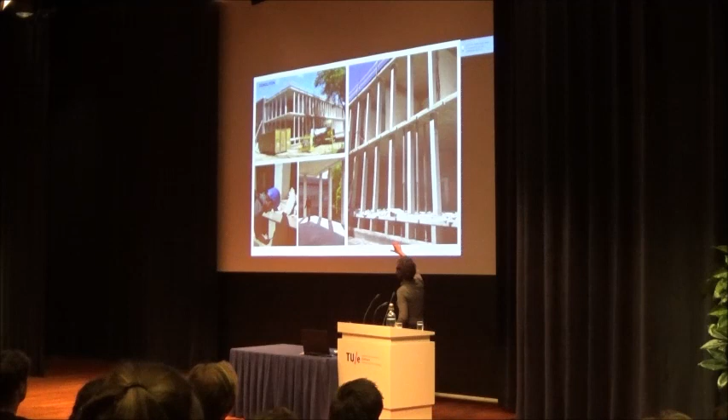Here we see the demolition. Of course it was full of asbestos, and they had to take all the asbestos out. We also see the really defined structure, so every 80 centimeters there is a column. And at the left back you see the brick structure. During this demolition, which was totally helpful for us, they took all the stuff out of the building and dumped it against the brick wall.

During the competition we were told we had to recycle the brick wall because it was in good condition and more durable, etc. But then the builders trashed all the building rubble against the brick wall, and the wall cracked. So then we could also design a new facade for this brick wall. Sometimes it's turning your way.

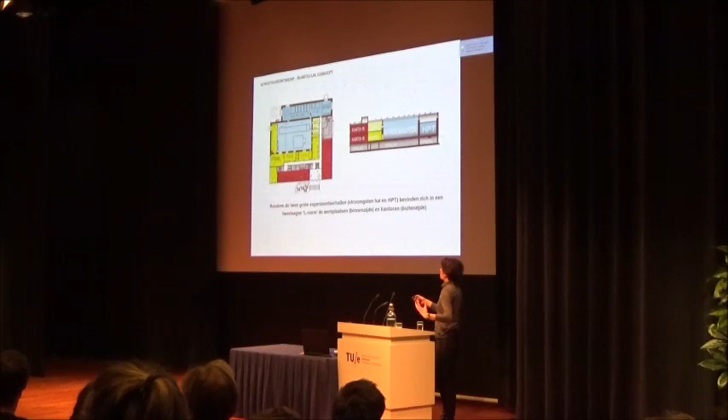They have five different groups spread over the whole University of Utrecht, each with a lot of space to do what they want. Now they have to collect themselves in this building. They were never together before. Somehow they see the benefit, because of course you get cross-pollination between the different disciplines, but on the other hand they now have so much less space. So it was a big discussion, talking with them about how to fit all these different disciplines into this one building.

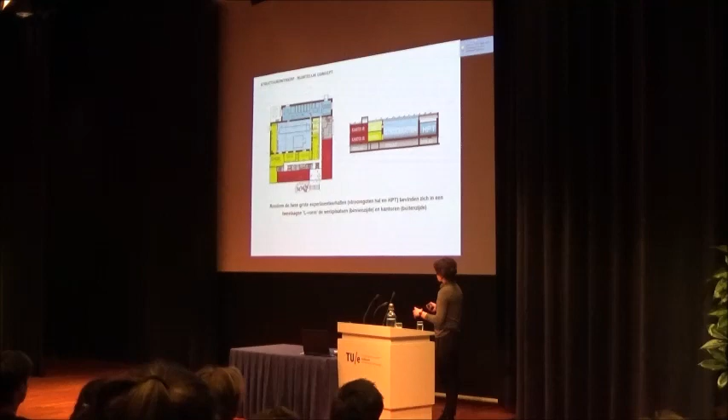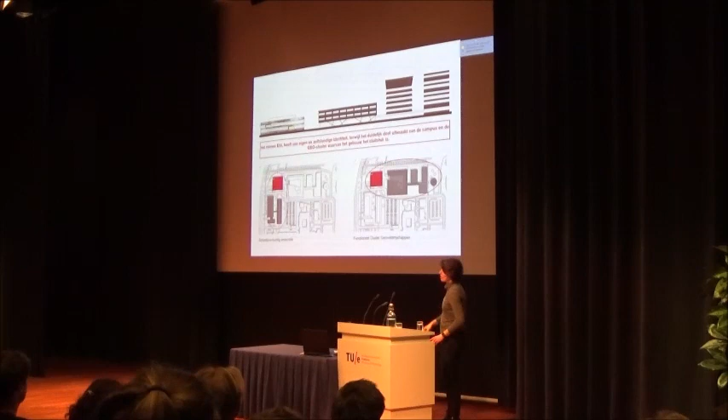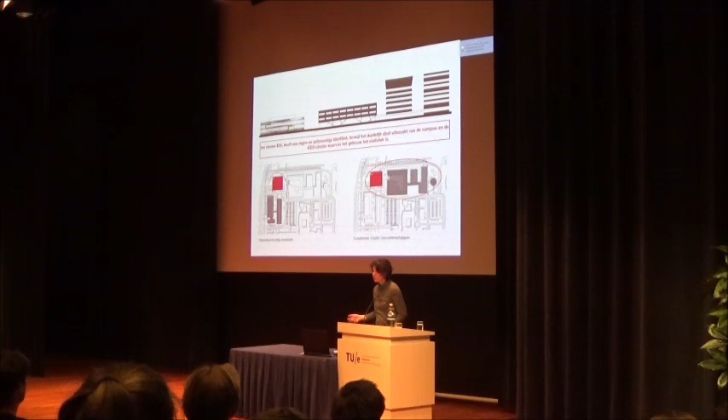Whatever is said, it's also a cluster - a cluster of geoscience. Our building is in the red, and somehow they also feel it a bit as a cluster. You have the cluster of medical science at the University of Utrecht, and then you have this cluster of geoscience. So somewhere there has to be something like, I'm part of this, and I look a bit like the neighbor, but I'm just a bit different. That's also what we picked up in this design, so you see these strong horizontal bands.

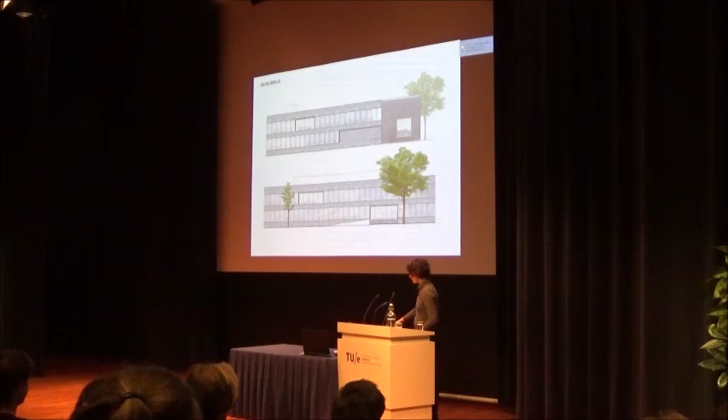That's something we said we should pick up in order to be part of this geocluster. And this was the facade expression as we presented it for our competition design. So with the old brick facade and the strong horizontal bands, we took away the upstand, so you had full glass from floor to ceiling for the offices and laboratories.

That's also a bit like referring to our background. My partner Dirk and myself, we both were at Herzog & de Meuron. Afterwards Dirk went to OMA and myself to Foster. But for us, the reference for having an office, how you work, and the way we want to work is still Herzog & de Meuron simply. And of course they're also famous for the facade, and that's also what still triggers us in our conversations about how we want the building to express itself in its context - in this sense, the University of Utrecht.

It's the Faculty of Geoscience, so at a certain moment we had all these really beautiful pictures on the wall as inspiration about what the Faculty of Geoscience is working with and what it's about. Our idea was to somehow represent this identity of geoscience in the facade. Especially because people from Japan and America, everybody's coming here, and to really express within this huge amount of buildings on such a university area where you as a group of researchers stand for was first important. So we took one of these pictures and did an abstraction on it, and we wanted to show it in the facade.

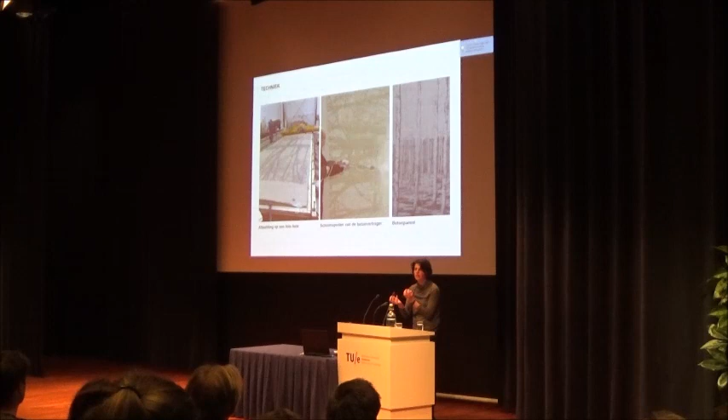On that spot where there was the paste, it eats, let's say, the top surface out of the concrete. So partly your concrete is still the smooth concrete as we know it, and partly the concrete is this kind of 60s concrete where you see the little stones. In that way, you get the difference in expression from the top layer of your concrete, and then you can make images like you see here on the right hand side.

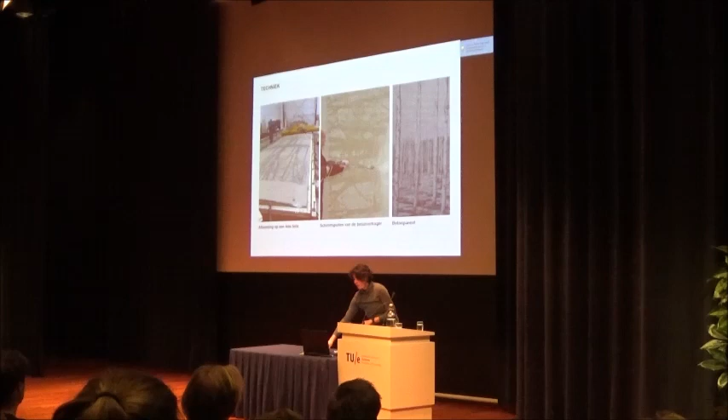I explained this when presenting the competition for the Faculty of Geoscience, especially because it's a procedure which has to do with a natural material like concrete and kind of biting out of the concrete. They immediately had an attachment to it and felt that's a procedure about natural materials - how do you treat natural materials, and what's at the end the outcome of it. They were totally convinced about this concept, and also about expressing where they stand for to the outside. So this was one of the images we had at our competition design.

But then we went into the VO stage, and we came to the conclusion that for every panel - and we have 90 panels on this building - you have to buy a new membrane every time. So we had to buy 90 membranes, and the cost of the membrane was really high. There's no repetition in it, so basically there was no way we could afford it. I mean, it's not a museum or whatsoever, it's a public entity, it's a university. So basically, then our concept was gone.

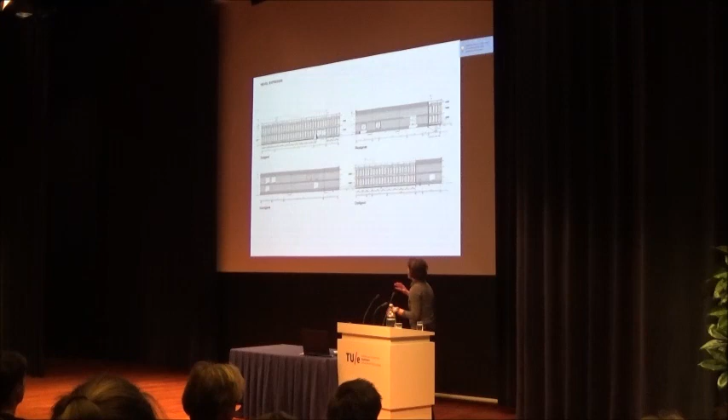What we do in our office, when we have such an idea, we constantly try to switch between making renders, like you see here, and on the other hand also making models.

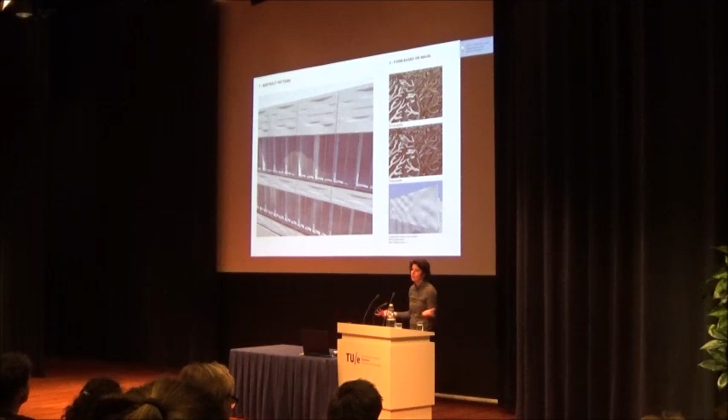Going back to this, what we basically saw here - my meeting is all the time in Utrecht, and I see this building from Wiel Arets, this library, if you all know it. I thought we do the same, only that we make a positive instead of him making a negative, and I was like, no, that's not going to work. Then thinking about universities, since I studied here in Eindhoven, I was like, okay, let's switch to something more modern.

We did different site visits here under the building of Wiel Arets, which we thought first was nice. But the problem with glass is that it's a very vivid material as long as there's light on it. And in the Netherlands, half of the days it's overclouded, and then the glass buildings look dull.

In our case there wouldn't be light from the back because on the opposite it's glass from floor to ceiling, and this imprint glass is basically a black box. So there wouldn't be something sparkling behind. All the time when we tried things with this glass, we found out that it's absolutely a dull material, and also if you render it, nothing is sparkling.

Then we started to think about layering the glass, but the problem is also, for your reference, such a panel is more than 3 meters long and 1 meter high, and the top ones are 2 meter 40 high. So it's 3 meter by 2 meter 40, and we went to these glass factories and they basically said, if you want to do it a bit economically, you have to do panels of 30 by 30.

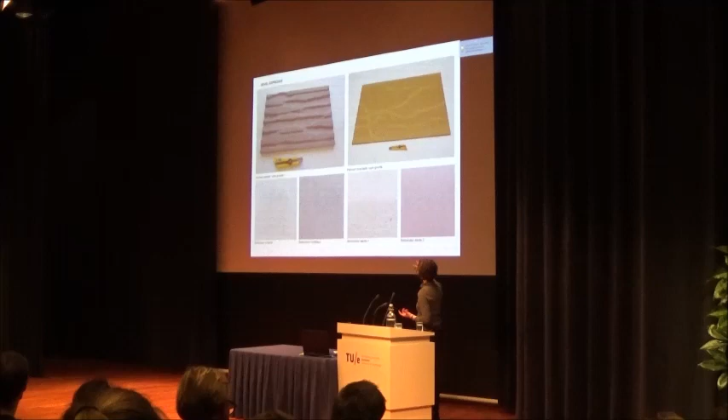From these 1-to-20s we went to 1-to-10, shown in the top right corner, where we tried milling out of an MDF panel. With the top one you see we milled several layers so it really became bumpy, and then we milled with one layer. At the same time we did an extensive research into concrete factories to ask about the different colors of concrete. We wanted to symbolize the color of the earth, so we were looking into these more reddish earth colors.

We also came back to this idea of repetition, but the last thing you want is to simulate a delta and see it's just one panel repeated after another. So we tried to come up with a pattern, a simple trick where you do A, B, C, D, and then these match again. Then you can turn it around so it looks like it's running through, so you do pattern 1, pattern 2, 1, 2, 3, 2, 1, 3, etc. Then it looks like the delta is running through.

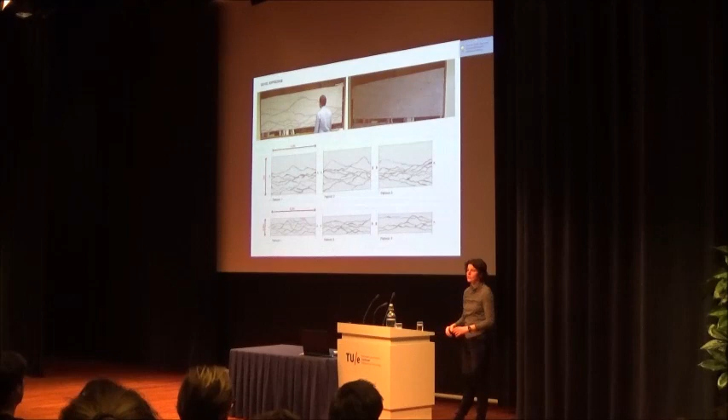So in our office we tried, on a 1-to-1 scale, how such a panel of about 3 meters by 1 meter would look in the two different versions I showed you earlier at 1 to 20 scale.

You should see this a little bit upside down, but then we were thinking, you have this concrete and you start to carve out of it, but that still doesn't really look like a delta, so we had to put something in it to make it look like one.

I had a conversation with an engineer at ABT, explaining that we have this concrete panel but it's a bit dull, and we wanted to pour something into it, maybe glass or resin. I was discussing all kinds of materials.

He came up with the fact that a lot of concrete bridges in the Netherlands these days are reinforced by RVS plates, because there are so many traffic jams on these bridges that they start to bend through.

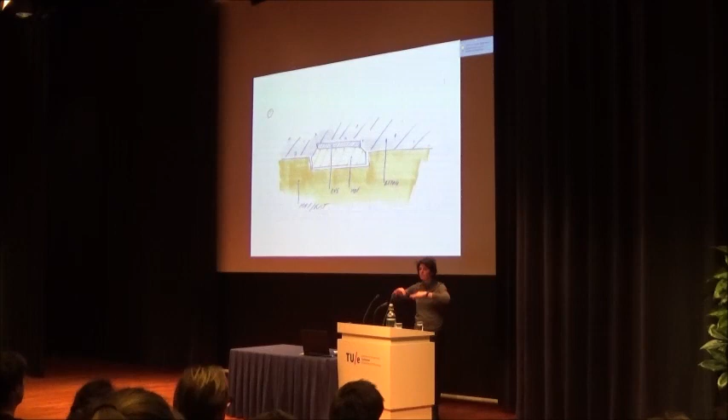Rijkswaterstaat had to come up with an idea to strengthen the bridges, and they do that by putting RVS strips on these concrete bridges. I thought RVS would be beautiful, because it's like a mirror that will shine and symbolize the water.

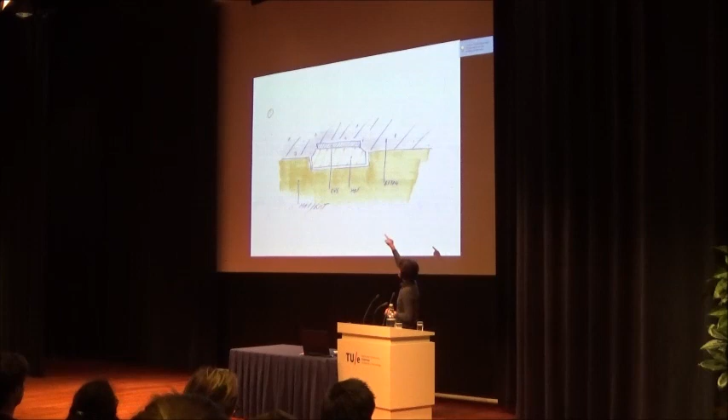So the trick is what you see at the bottom: you have the box where you pour the concrete in, and on that box there's a kind of positive mold. There's a layer of magnet, which is a material that pulls on the RVS effectively, then you put a strip of RVS on it, pour the concrete on, wait, and then lift the panel up. Then you have a panel with concrete with the RVS strip in it, which is this.

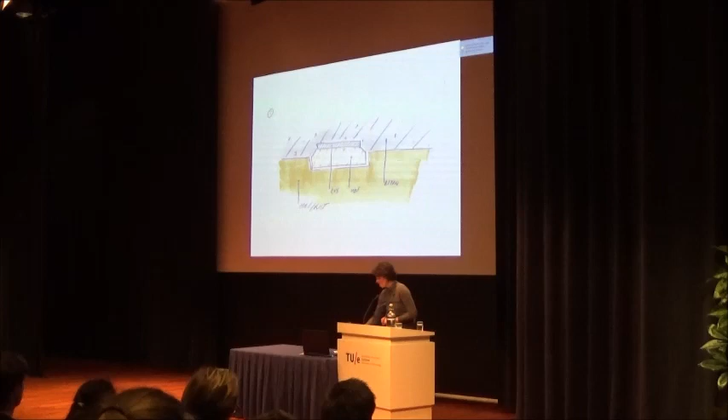So here you see that we tried this process. On the top, I think it's 6 millimeters deepened. On the bottom, the RVS is like 3 millimeters into the concrete panel. And what we also tried, like the first time we did it...

They also didn't instruct us really well, and we didn't give a slight chamfer to the edges, so we couldn't lift the concrete out. This was all trial and error for these concrete factories, since they never did this before - the edge has to chamfer a bit, because you need to pull the concrete off, and you have to make sure the whole thing isn't clamped around the mold, since it shrinks a little as the water goes out.

All of a sudden, after doing all this kind of craftsman's work with the concrete factory, we switch again to making renderings, because that's the only way to get a perception of how it will effectively look on a larger scale of the building. This is a bit of a zoom in, but it shows how the panel presents itself in the whole ensemble.

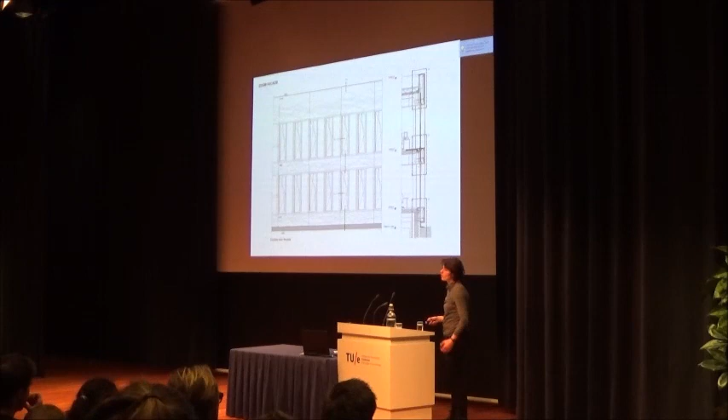As mentioned a couple of times, the glass goes really from floor to ceiling. That was, let's say, a given for us, especially with such a deep building. You want the glass from floor to ceiling to get the light as deep as possible into the building. And we wanted to apply a passive ventilation system, so it's a climate facade, it's a double system.

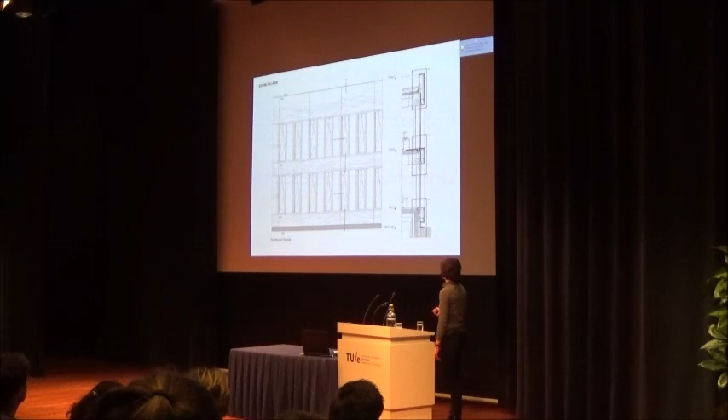Meaning there's a cavity at the bottom, which in summer is open, so the whole thing works as a chimney, and the air is pulled out at the top. Then there is slight overpressure in these rooms on the inside, so the air is pressed out of the facade and ventilated to the top.

And if you desire, you can then open a window there to the climate facade. Also acoustically, because it's close to the highway, it's kind of a durable option in an energetic way - from an acoustic point of view, you would never be able to just open the windows here. So you always had to look at this double system.

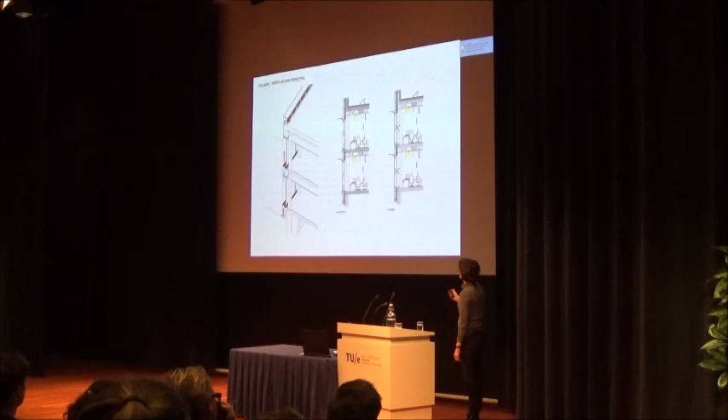Then in a winter situation, you would close it at the bottom. You still have the same principle of the air being pushed through the facade and out to the top. So we had to deal with an existing structure.

These are the columns that you saw. Then to the column there is a steel console attached, which is this orange element. On this orange element, the concrete panels are hanging. The concrete panels are 12 centimeters thick, with the dimensions I expressed earlier.

Then the single glazed element of the climate facade is standing on this concrete panel, and then this double facade of the double glazing element is connected with a bracket to the floor slab.

Then we have sun shading elements in the climate facade, and of course it was our desire to get everything as flush as possible on one line.

Then here you see the box. Here you have a vent, so the air goes through, and then through this box, which is kind of a klepje, pushes the air out into the chimney.

This is then the expression from the inside. Here you see the cables of the sunscreen, and then the double glazed facade with a grid of 80 by 80 centimeters on the inside, and then the single glazed facade with a grid of 1 meter 60 on the outside. This is the vent with a grill, the same grill as applied here, and the electricity etc. which runs through here, which are floor pots.

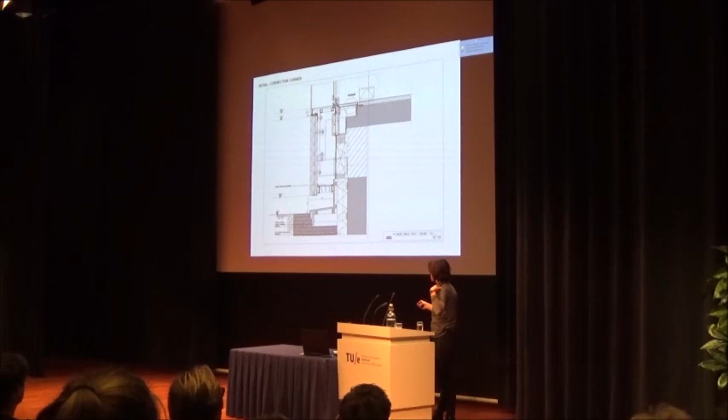And the challenge was also how to design this so that the air indeed has this fluid entry, as you can see.

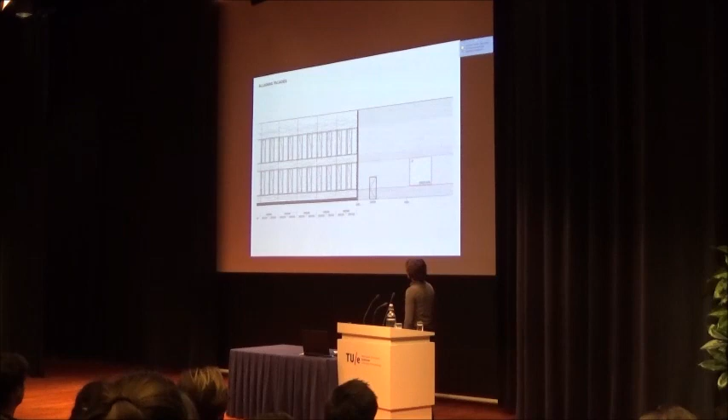The next thing was, due to this building, we also had to really think about the facade expression of this brick facade. The idea was that everything lines through perfectly, and these horizontal bands are also expressed in this brick facade, and the windows, as they are here 3 meters high, are also 3 meters high in this brick facade. And since this has a certain relief, we also wanted to apply a certain relief in this zone.

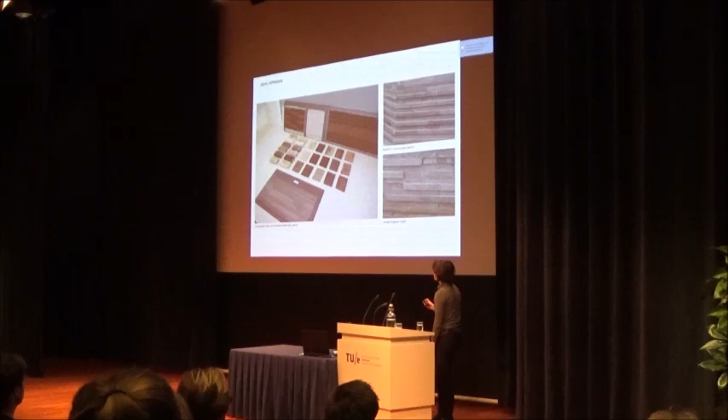Well, here you see the whole test of what kind of colors we wanted to go with, and at the end a test piece about the relief, whether you want to use a continuing relief or more jumping types.

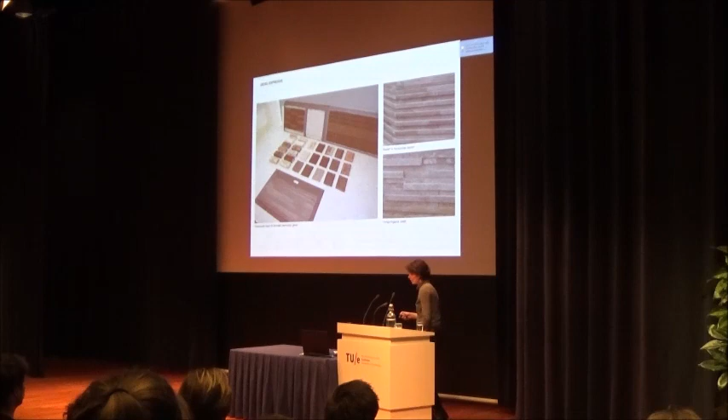And again, you see here the swap as we try to apply it, that we go from looking at real materials, real colors, talking with these builder guys, to then try to render it in our office in detail, how we want the junction, and also how we want the climate facade to be totally flush. Also here have the glass totally flush without any framing, joining with this brick facade.

And this is kind of the last studies that you also see, building further on this mock-up that we also had. It's like, what is then the junction and the jump between the climate facade and the brick facade? And is it a U-channel which runs all the way to the bottom, or is it a U-channel which basically folds itself under this climate facade?

And also definitely with the experience that we have as architects, I mean, you can't refer to like, yeah, we did it there 10 times and it worked out. So for us it's really like, okay, we have to test and test again and judge, and also look at different situations in order to be convinced about what we put on paper at the end.

Yeah, so here you see the choice at the end, the U-channel in between. This is then a brick facade. Well, this is the concrete wall, and actually this is an insulation panel, and this brick facade, they are just concrete strips in the shape of bricks, which then are directly glued to this stiff insulation panel.

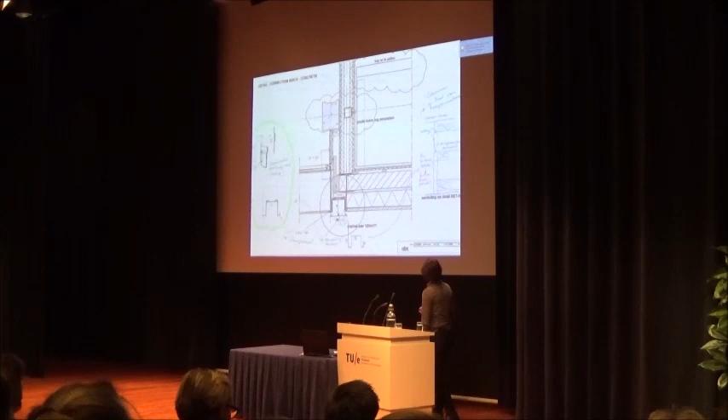But yeah, these are kind of then the sketches that go in the evening to the engineers to ask a bit what is possible.

That project, I spent the whole weekend reading the spec, or in English the specifications. There was a first tender for a builder. At the end there was only one builder which made, let's say, a subscription, so they put it again in the market. The guess is that in April they will choose a builder, and then after the summer break they will start constructing it.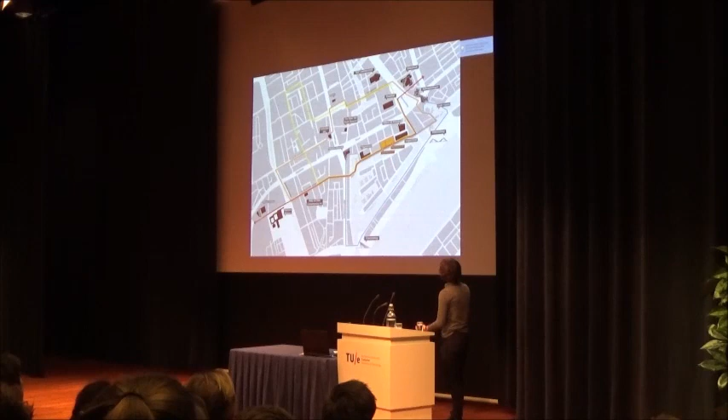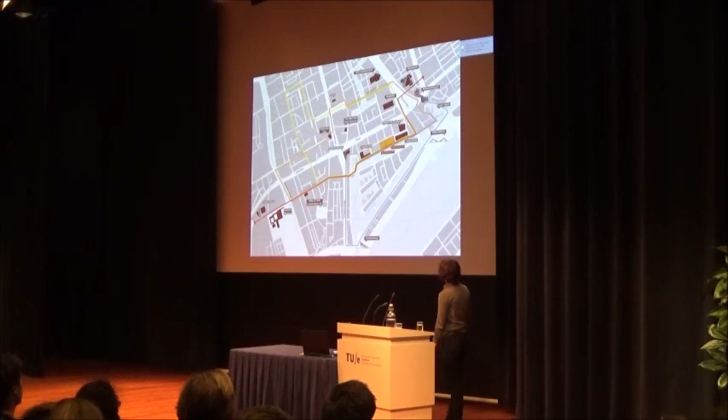And this was also one of the images that we presented to the city, where we said we have actually quite a critical puzzle piece in between the development of the market hall and the Oude Haven, and this is the museum quarter. Rotterdam is investing a lot of money at the moment to make it a more pedestrian city, and in order to connect this with that, it's very important what all happens along this strip, and of course in particular what we're going to do with the architectural expression of such a building.

And especially because we have the ability to create this ensemble with these two towers. Quite in the beginning we had all kinds of different volume studies, and what we basically said is rather than making the plinth, which as I said a couple of times is very important in this development, but rather than making a plinth and a tower on top, we wanted to make one sculptural gesture.

And this is the sculptural gesture which we created, and I'm going to explain a bit more in depth about it. Basically, there's a building regulation which says you have to set the towers 10 meters back from the rooilijn, the edge of your building plot, from the point of 25 meters high. So the tower folds gradually from this 10-meter stepping-back point down to zero, and then to the plane below.

And of course we were already hoping in the beginning of the design stage that our investor would also invest in the neighboring building, and at a certain moment we knew he would. So we took this as a chance to have some fun and bend it slightly away from the neighbor, in order to create the desired privacy for luxurious living in the center of Rotterdam.

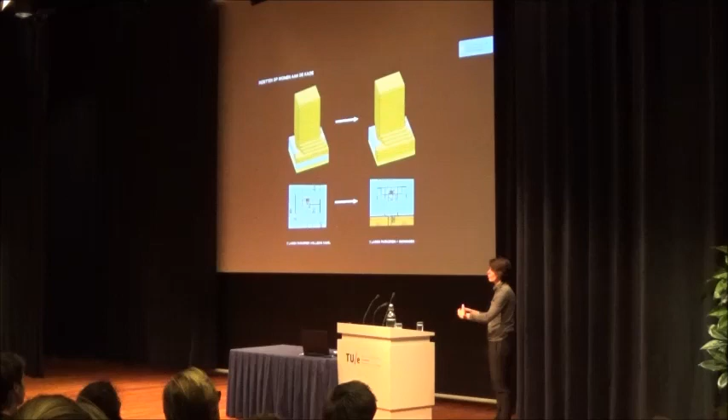The first trigger was that the plinth would be commercial, everybody agreed on that. But in the neighboring building, which we'll see later in a picture, they made two levels of parking above this commercial space, and to me it's so irritating. Every time I bike home I look into this parking garage and see these long TL lights and this anonymousness above the commercial plinth, on what's actually a south-facing facade on the water. So the first thing we said was: that's not what we're going to do.

We're going to make it all waterfront housing instead. We pushed the parking to the back, and as a result we had to do it over three levels, which is of course more costly. But in the end it pays itself back, because this housing becomes so much more valuable, and as a project it has much more generosity and status on the water.

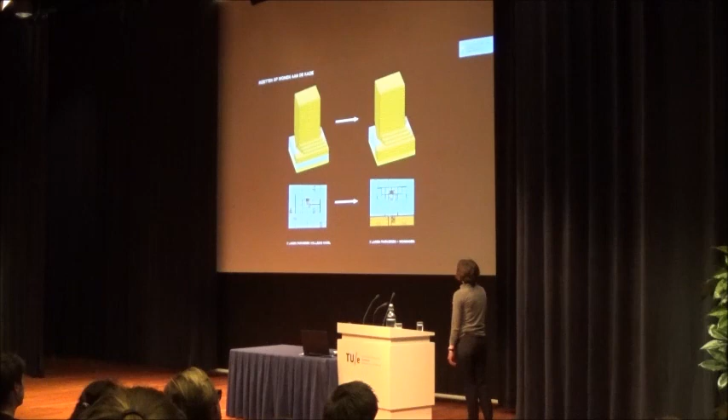The grey areas are the storage boxes. So here you see it's commercial all the way through, then three levels of parking, and a level of storage boxes behind the dwellings in the front.

This is the neighboring building with the parking I was talking about. Here you see our commercial level, then a level of studios which don't need outdoor space. So we couldn't have balconies here, and we optically stretched this plinth a bit higher up to give it the status you'd expect from a project like this. From then on, the dwellings go up until the 23rd floor.

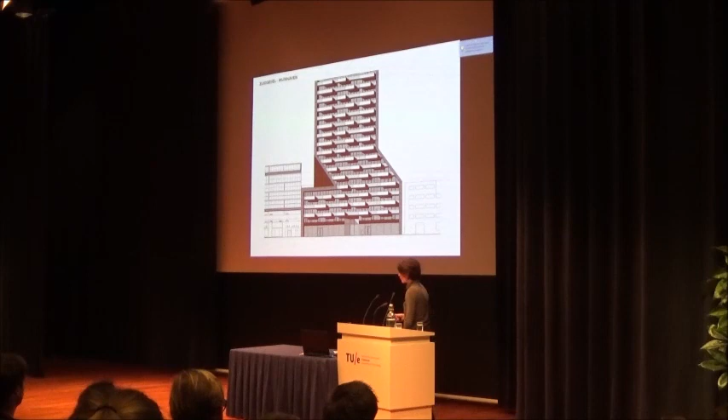It's an impression of this plinth, the black zone is for signage, with the studios here, which I think is a huge improvement over the open cavities that were once approved by Welstand and the neighbors.

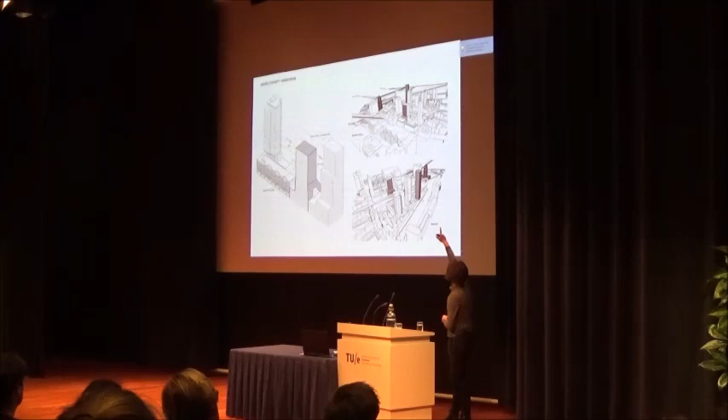The other thing was, besides bending away from the neighbor, we also said in our facade expression we should seek a certain amount of privacy. So the facades on the east and west sides are more closed, while the facades to the north and south, facing the Maas and facing the city, are more open and transparent.

This is also kind of inherent to the building system, because in the end it's what we call in the Netherlands a tunnel system, so effectively there are four tunnels placed next to each other. What's shown in grey here are the load-bearing walls in the project.

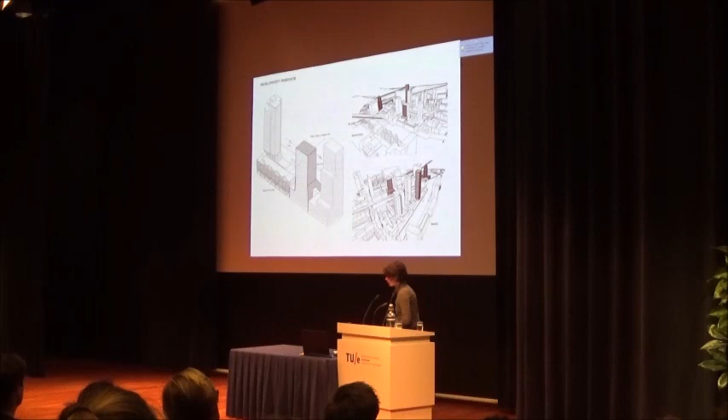We looked at a couple of references for these more enclosed facades, because since it's load-bearing walls, there's of course a limited amount of perforations you can do before the whole thing collapses.

This is the grid system we ended up designing, with two big open windows at the sides and smaller windows in the center, presented as a kind of stacking system on top of each other. These details are very critical, like how much meat you have in the diagonal between this window and that window for the force to go down and carry all the way to the bottom.

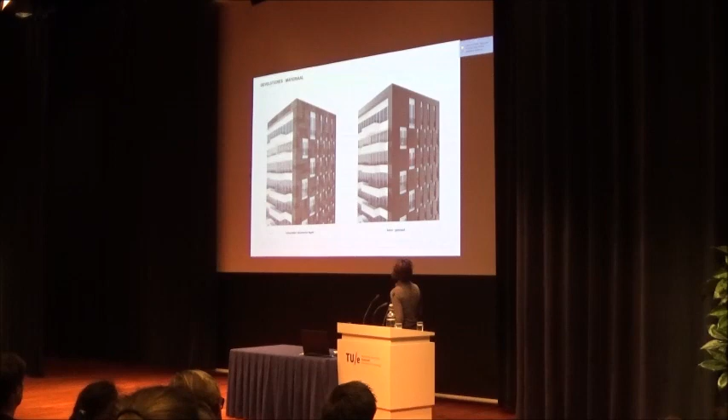Then there comes, of course, this process again about what is the reference, what kind of material is it? So we were looking at ceramic, at concrete, at Eternit, at stone, and that comes into the process when you're rendering and thinking about how it will look. On the left corner, you see if you start to use natural stone, you have to start panelizing it. Or if you want more like concrete, then it can again be one panel with patterns on it or without.

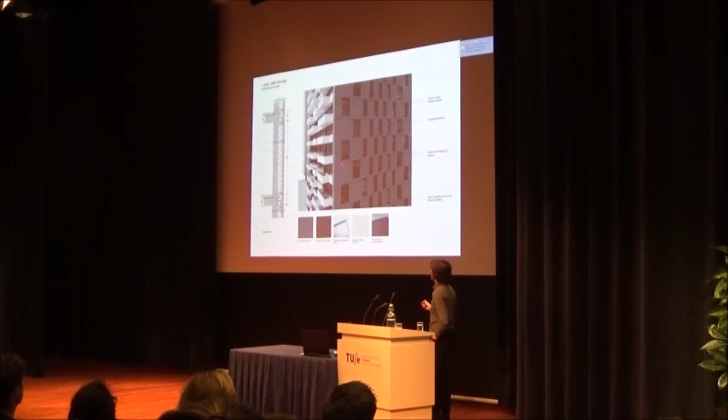This is the system we chose at the end, a dark sanded concrete with a light blue touch in it, which is a strong contrast with the more transparent and white south and north facade, and the black window frames.

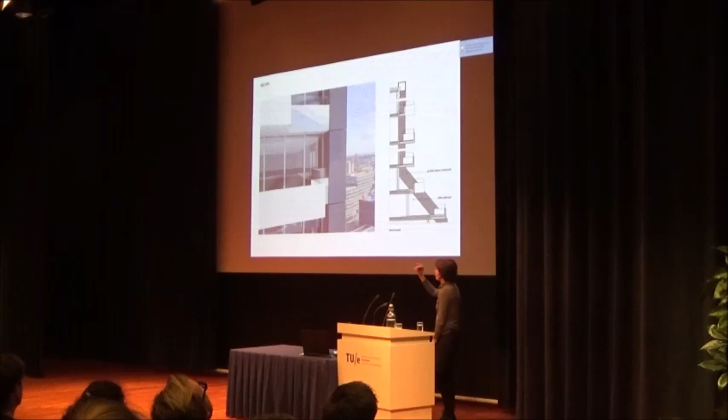What we found important is that this robustness or heaviness which the building has on the side is still expressed in the front. For your reference, this is about 1 meter 10 wide, a band that you also see in the south and north facade, strongly identifying the silhouette of the building.

I think here you see it quite well, the 1 meter 10 line, and what I explained before, that here we have to bridge that 10 meter setback all the way to the front. What you also see here, which you don't see from the side facade, is that this facade is going down to the bottom. So at the top it's 21 meters, and at the end it's 21 meters, that funnels into a 7 meter concrete panel, which brings all the force from the tower through the parking garage to the foundations.

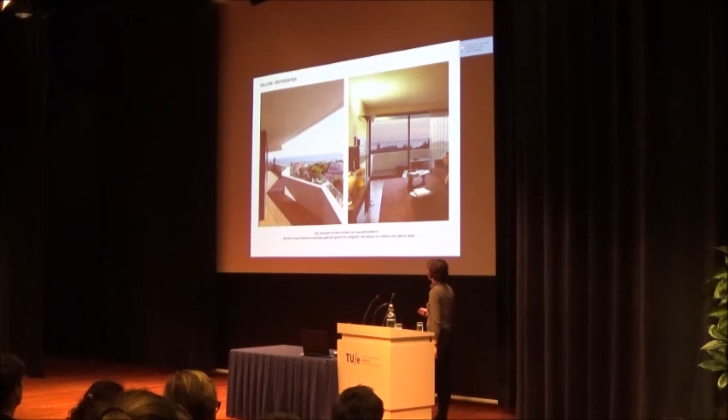If you talk with a broker in Rotterdam about housing, they all refer back to the Timmerhuis because it's such a success, because it has such large outdoor spaces. So for us, and especially for our investor, that was one of the first design principles to hook on, to make these really large balconies.

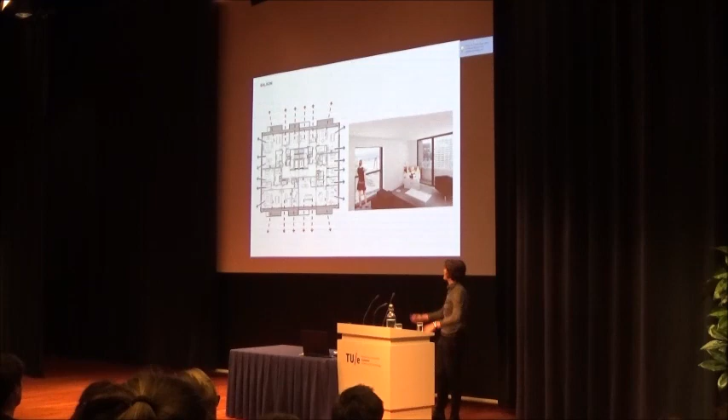The problem with these large balconies is that for your dwelling it's great, but if your upper neighbor also has these large balconies, then you have this head in front of you and you can't look down, and you have the shadow from your neighbor on top of you. So we immediately said we should create this kind of double orientation, here you have the large balconies, and here you have the large open windows.

These windows are 2 meter 10 wide, and it's a very nice system. They slide, there's a little motor here, and then the panels slide down. So you don't need fall protection, because the lower window is stiff and stays in place, and the upper window slides in front of the lower window.

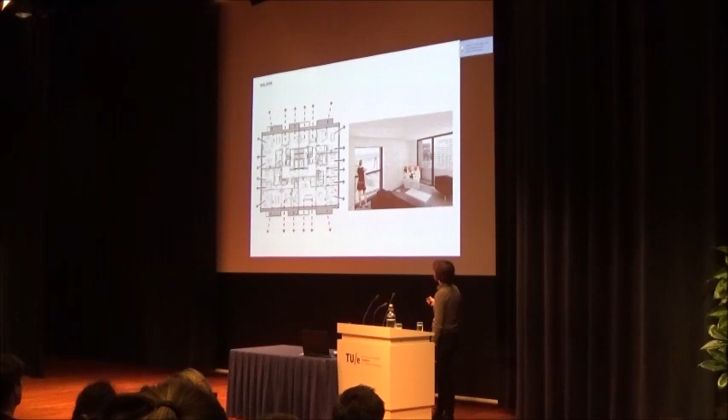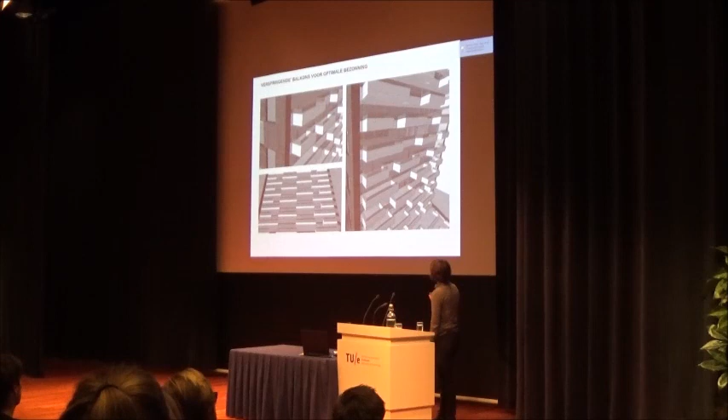In order to avoid this idea of my neighbor giving me shadow, we created this kind of meandering balconies that jump over each other, so that at certain zones in your balcony you have a double height space above you. We left a small zone of balcony, like a glazing clean distance balcony in front of you. This is 60 centimeters and this is then 2 meter 20.

This is then the expression that you get, and especially here in the middle you can really see how these balconies are jumping every level, and then also you create different apartments on the even and uneven floors. For your reference, these balconies are designed as white concrete balconies with a glazed balustrade top.

Then the problem comes, how to keep a 2 meter 20 balcony up in the air. So to go back to the building principles, it's like 4 tunnels placed next to each other, a tunnel of 7 meter 85, 615, 615, and 785. The red are the load bearing walls, and the green are the stabilization walls. So actually what is stabilizing the whole structure is what you see here, it's a kind of an H, and here is an H. Funny enough, it was better to not use the core, because this is in the center, but if the wings of the building are stable, it's kind of stabilized on itself to the bottom.

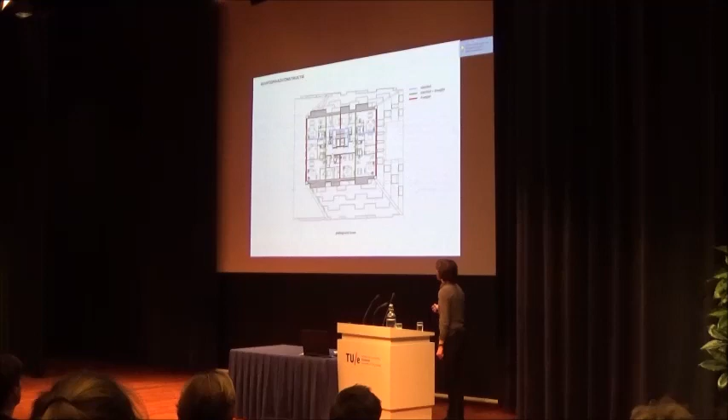And then what I said earlier, you have to imagine that this is 21 meters, and that narrows itself down to a kind of a 7 meter zone, which goes to the foundations. But the problem was to hang here a balcony on a floor which is already, for concrete, a 7.85 span, already quite to the extent, especially for the thickness of the floor slabs which we had, which are 260 millimeters.

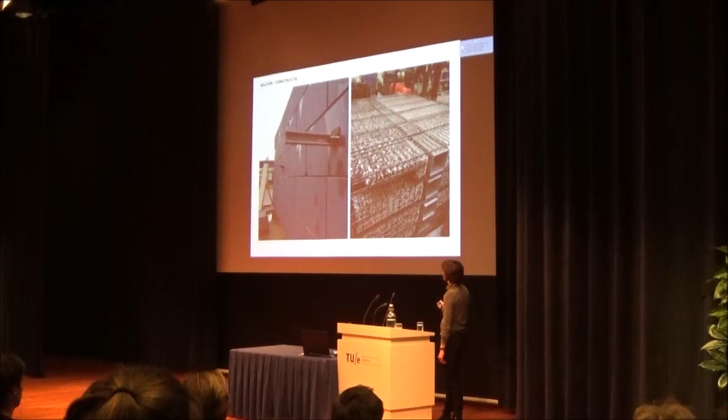We had this principle that at the end, this hook is poured into a concrete slab, and then later you come with your balcony. So this is the balcony, this is the EPS element which is put into the concrete, so later you get a thin concrete skin over this. So in effect this balcony is quite light because of this EPS element in it, and then this slots over these elements. But these elements are in the floor.

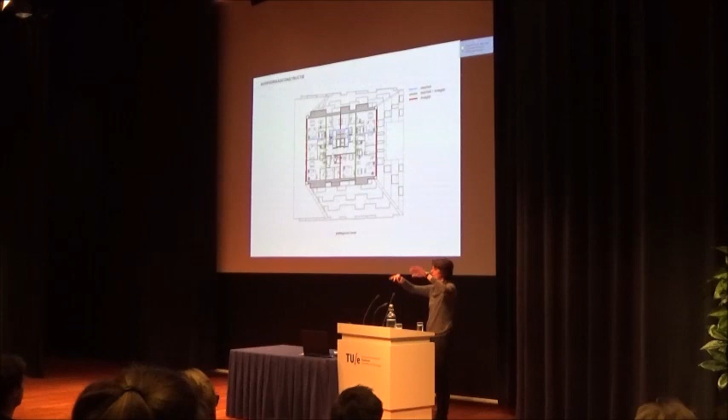The problem was that when we put that element here in the floor, in the first calculation, the whole thing just collapses because the moment on this element becomes too high because of the big cantilever.

So we really had to shift our balconies again because the steel elements had to be as close as possible to the load-bearing wall, and couldn't be in the middle of the floor.

To shortly also tell a little bit about the program. So what I said earlier, these are studios. Then here there are about 90 square meter apartments. Then these are very special, very generous apartments with inclined floors and ceilings. And then from here, level 9 up, it's basically 5 apartments, then 4, 3, and 2 apartments on the floor.

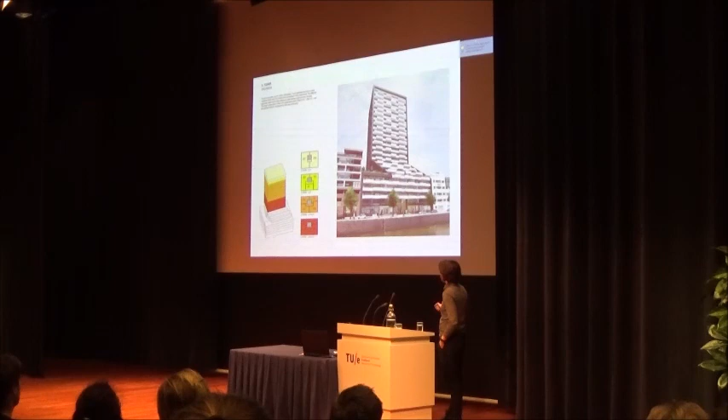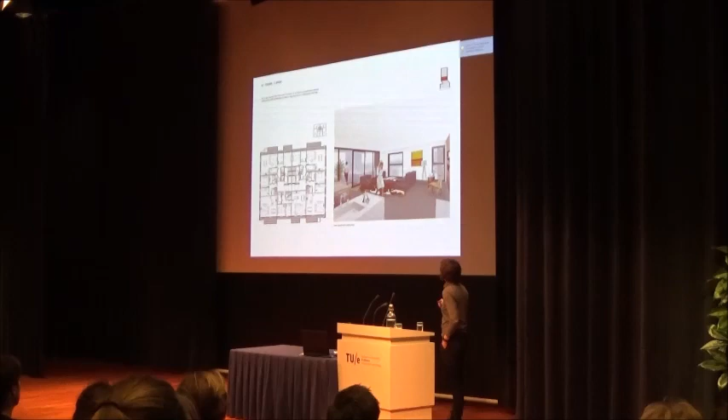So here, once again, you see this condition of this balcony, which feels really a bit protective if you're standing on the 20th floor in windy Rotterdam. And then here the window, where you can really put your feet on the line of the glass and look out over the river and the rest of Rotterdam.

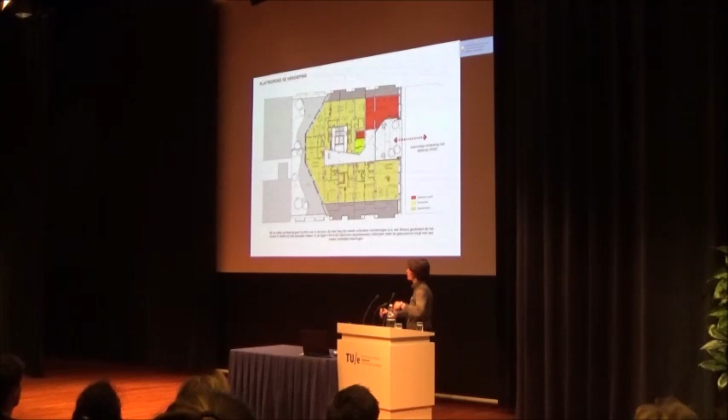And then on the 5th level, the first level of the inclined bit, we created this special floor with communal services in it, and an opening towards the terrace of 65, which is going to come there. So the two developments can really work together with a shared roof terrace and all the amenities next to it.

So here we're now standing on the future development of 65, and we look back into this inclined bit with the patio of 69, and then here you would go to a small fitness area.

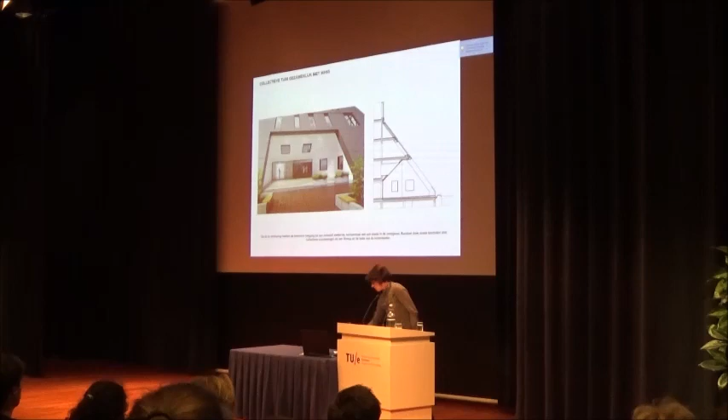So here you see what we just talked about, and if the development comes up here, then they have a shared roof terrace.

This project is now in a technical development stage, and we will start constructing it about the same time as the laboratory building, so the 3rd quarter of this year.

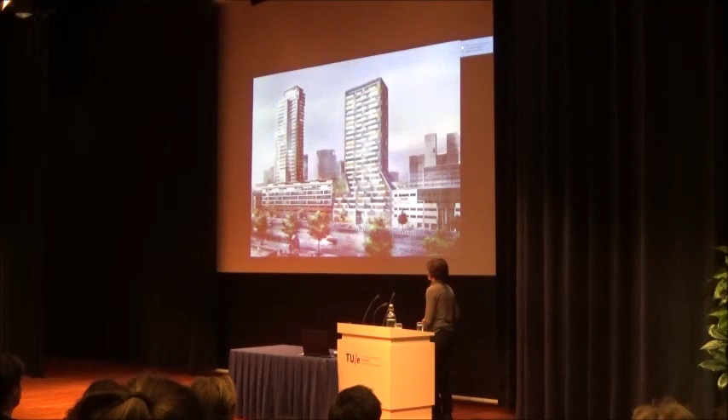There's just one project which I want to explain in 2 minutes, because I think it's nice and clear that it gives an insight into how we design and how we work, how we make a project from a design stage to a building stage, and which techniques and materials we apply in order to get an understanding of how it will effectively look like if it's real.

Moreover, for us, from our office, it's very important that each building is unique in itself, so that when you go somewhere, you know it had a certain distinct quality, and you know that building was in Eindhoven, not like one station area where Amersfoort looks the same as Almere, looks the same as Heerlen or whatever, everything just stacked up the same. So I want to very shortly show you one competition, because the way of looking and giving a distinct twist to the design is something that, even at a stage where you design projects which luckily don't have to be built yet, gives a distinct feel to your work.

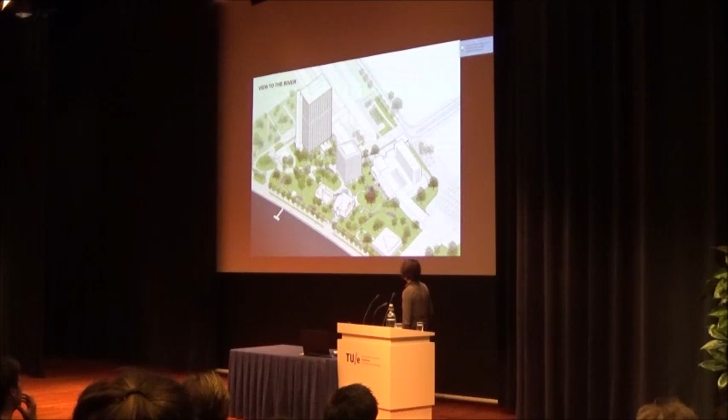And yeah, it's still a bit shit, mainly because I'm still convinced that we had the nicest design, but our opponent put it here, actually on the river, and the site plot was going here. We thought, if you do something in Germany, you don't go over your site plot. But he did, and he won, and our design was nicer.

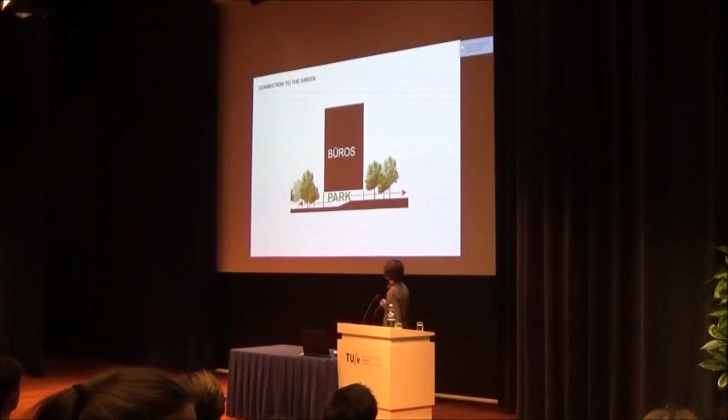Why was our design nicer? Because it was clever. We had the offices, we had the park, it had the height difference, and the foyer connected in a really nice and transparent way. The park, and you saw the core going through, and it all looked really chic with a nice ambience. Everything above was secured, and this was a bit open. It was logistically very clever.

But what I think the twist on this project was, is that if you go to the UN buildings in New York, you see all these waving flags in front. We took this idea of the waving flags and transformed it into a concrete element, which we applied as a louver for the building.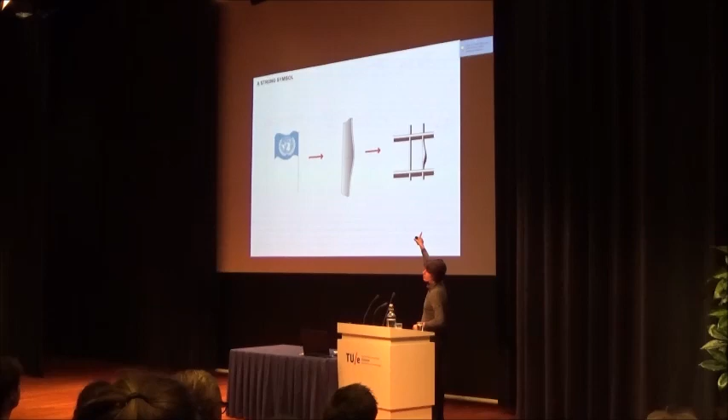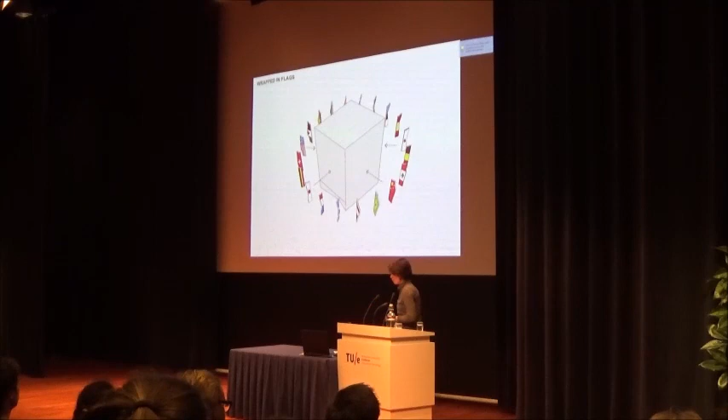We had this story that we wrapped the whole UN campus building in all the flags of the world. It's a kind of cheesy story, but people were attached to it and they liked it. They're building quite a costly building at a very prominent location, and they felt more connected to the design, understanding the 'why' factor behind it.

This was one of the models we made, simply out of blue foam, where we had very elegantly these waving flags, every other at the end. This is step one, so it's straight at the back, and then the waves in the front. This element was also nicely settled with a curve.

Here you see at the end we applied it every other. We also had a whole technical concept behind it, which included bomb blast protection and also passive energy and everything.

But at the end, it was, I think, this transparent plinth with the top which felt secure but still transparent and open, which to me was for sure the winner.

I wanted to close off with this picture, and I wanted to present this last project very quickly. If I could give you one piece of advice, I would say let's not try to make anonymous architecture. I'm not advocating decoration or making things overly expensive, but make it somewhere, give it a human or personal twist. That's what we favor as an office, and that's what we hope to construct for many years. Thank you.

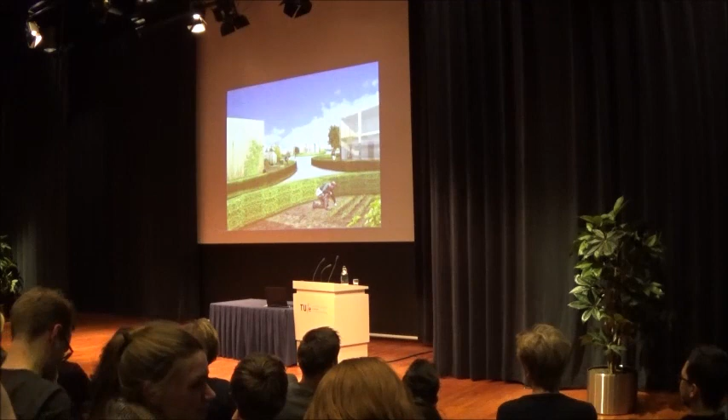The old farm where I was starting with, the farmers are leaving the country, but there are new farmers coming back. That's the tiny — you get the tiny house movement, but you also get the tiny farm movement. You don't know it, but it's coming, when you want to do things by yourself and work in your garden and live from your garden, but also say to your neighbors, you can just do something with it.

Maybe you can do something else. You can make another kind of area, build your house for yourself for a part, and the same with the garden and the space between it. There are artists living next to a barn, where we have made this illusion. But in Utrecht, we are working together.

I show you a lot of things — not a big building, finished last year, the Student Cloud in Utrecht, where we worked together with Tichelaar Makker, with the tiles. Together with Tichelaar Makker, we spoke about, well, when you have the cubes in a city area, you can make it lighter, you can make it more popular, artier. And thinking about when you want to live here, I'm thinking about my own tile.

So the tile from the toilet — everybody can say, I want to have this tile, and we make a billboard tile wall. Is it a painting? Is it a wall? Is it art? Is it just, what is it? A commercial? Could it be commercial? You see it.

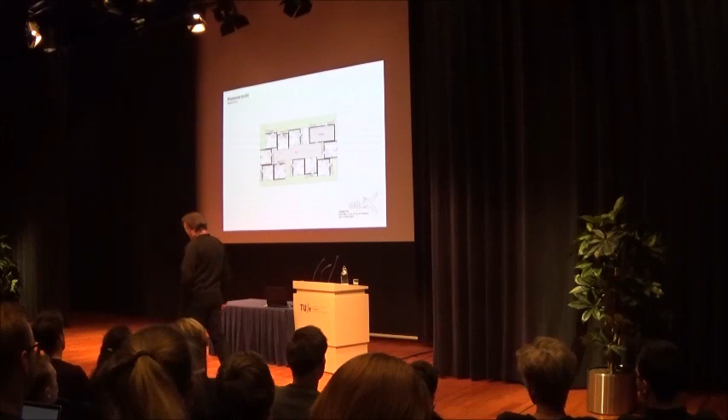Together with Peter Lubbers, we are thinking about green buildings and how to connect the green building with cubes. These are some illustrations about the Casbah cube way of living - but it's not only for people entering Holland for the first time, it's also for startups, for flexible or working areas.

I'm not that fast with computer programming, but I'm fast with sketch. Two minutes and this sketch is ready. Next sketch, etc. So next to your computer, it's very good. What you can do, where you are, with your hand or with your mind, try to use it in a good way.

So this is another study. We made it also next to a farm, a barn house here, and the cube is the empty space. So this is the cube together with the roof in an ending phase. But the ending phase, we made it for someone who wants to live next to the lake. So this we can now use, the developing of the cube, you can just start with this one.

But we have already built, after 1 year, we already have built the cube with the roof. So we are trying to practice the different directions together next to each other. And this is the loft area under the roof. Okay, that was the cube thing. The cube thing is a little bit changing because it enters a stair, a staircase, a stair house.

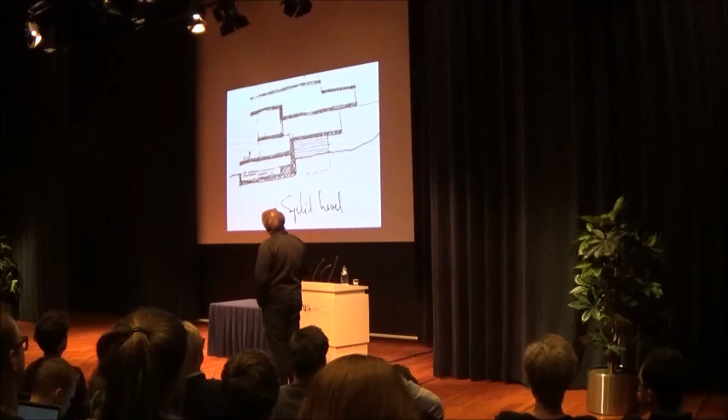So I was sketching 2 years in front of that for another villa, dealing with the split level. What is split level? How can I use it? How can I integrate it? It is a kind of wondering. This house has never been there. It's not there, but I have finished it in another house. I have made it in another house, and now I'm busy with my own house.

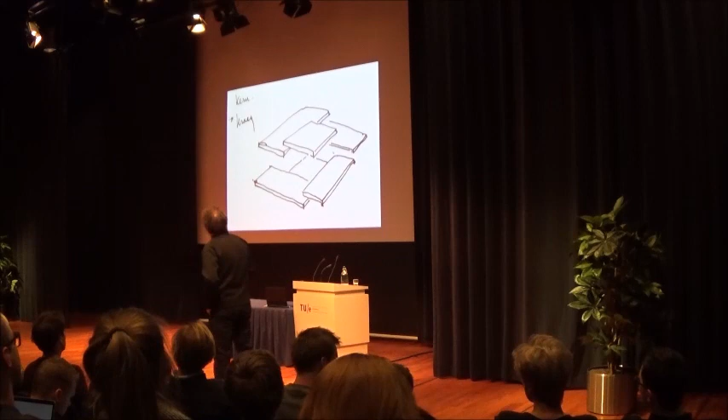It's also on this way. So, sketching, making grounds, making, is it 2 meters, is it 2 meters 30, well I'm now busy with 3 meters 40 height. With all these kind of sketches, you need it a lot, more and more.

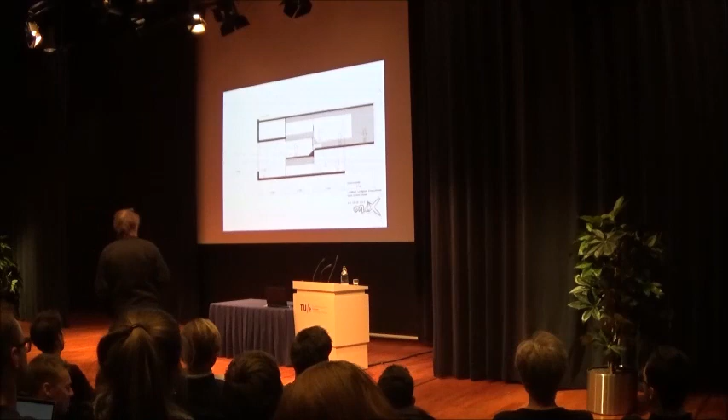And this is the scheme. It's a quadrant, 4 floors. When you have 4 floors, then in this case it's 3 meters 40. In the stair house in Almelo, it's 3 meters. This was the big villa I was going about. This is the villa. It's not built, it's just in my office on a plank.

It's related to dunes. In an area where there are dunes, you're just walking on a higher level and then on a lower level. And we were thinking that could be also a nice way to walk in your own house. How can you landscape your own interior?

So, without the sketches, I tried to figure it out with someone in my office to make some nice computer illustrations. And this is 1, 2, 3, 4, 5, 6, etc. So it's a way of abstract painting, abstract way of designing and thinking about what is the smart part of it. There are lots of smart parts, but one of the things is when here is a window and the floor is going down, then when here is coming light in it, the light is also on a lower part in your house, it's there.

And when the sun is shining in the morning in that direction and you are in that area on the other side of the house, it's indirect. The sun is coming into your interiors. Also, you're not on that kind of side.

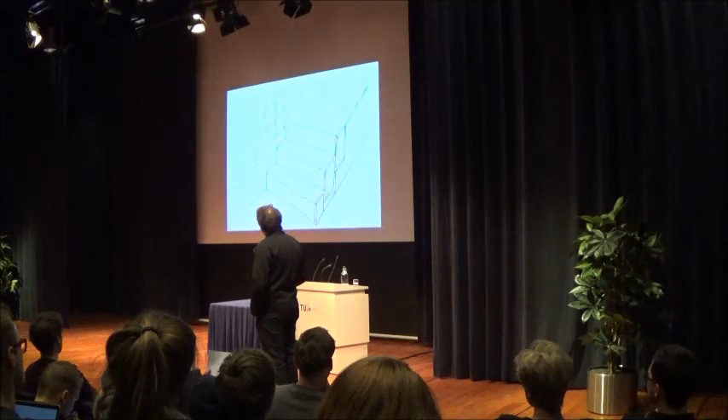I made a lot of sketches like this, talking about a building and making it very flat. And it's a cheap house, a really cheap house. You see these kind of spaces and you're thinking, wow, it should be very expensive, but it's not. It's 7 by 9 meters, 150 square meters, and it costs 150,000 euro. Is it cheap or is it expensive? Cheap. It's cheap.

The material, the plywood, comes with wood, so it has its own expression. What do you do with the own expression? We dealt a little bit with the walls outside, made it white painted like this, and the other floors and the inner walls we made just like the materials they are. So these are white painted, but you see it's plywood, and just the inside is plywood with glue on it.

Here you see where the structure inside comes into the structure outside. Is it the window, is it the structure, the construction? Is it theater? Are you living here, or are you making your own theater for someone else who's walking with his dog and looking at you? Alright.

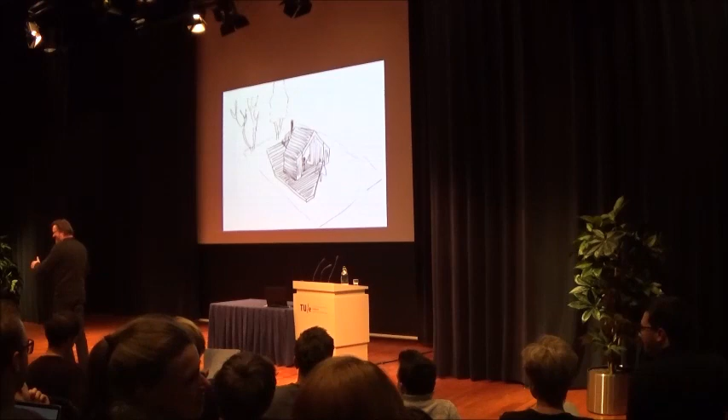Oh my God. When you start with your career. Okay, career. I have to start with my own career.

So when you start your career, why are you living next to another one or above another one? You can live in the green. When you have a space - you used to have a space like 20 square meters, well 36 square meters is a lot more - and then you're living in a green area.

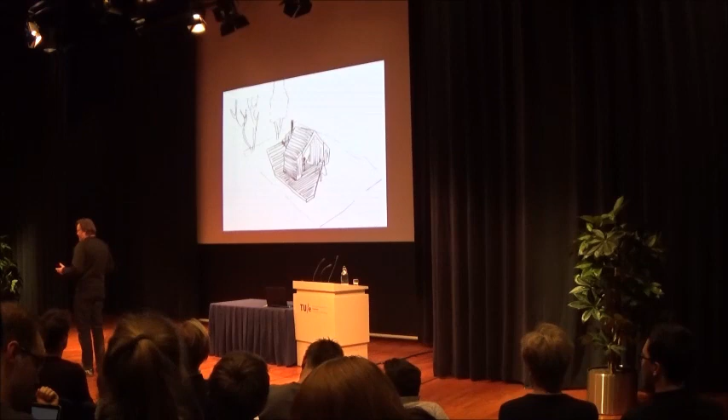So I was saying, by this garden house, this could be a starting up house. In Holland there's enough space - some people think another way, but I think there is a lot of space. How can you make the dream come true and live in your own house from 50,000 euro? Of course, when I had this point, there was 15 years with my career.

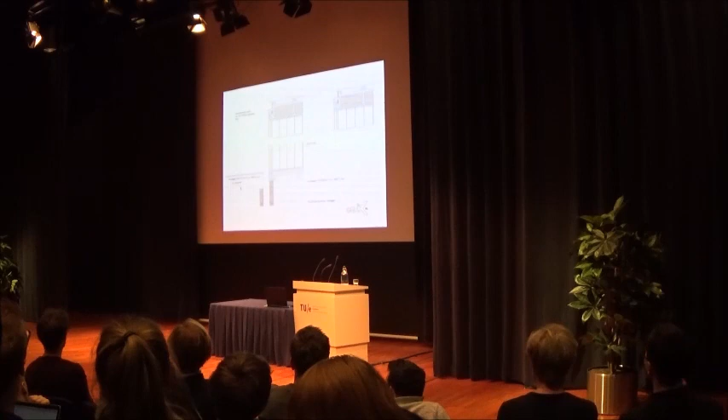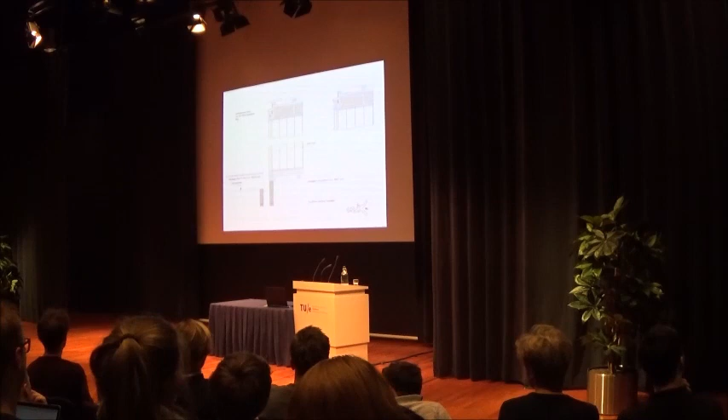It was very good, just building it together with the carpenter and also drawing everything technical, what has to be done - just a way of technical drawings. This is the heart of it, from concrete, and the rest of everything is wood. So everything you need is in it, and I'm going to show you.

This was my own project. Having 2 weeks of my holiday, not 5 weeks - just short holidays, sorry, 2 weeks. I had to build this concrete kitchen, but also the chimney.

Then we just leave it like this. But there has to be a fire in it, so you have to finish it.

I put the old tiles in the garden, on the ground, on the clay, and a wooden structure in the foundation, making different types of wood connections, some ventilated, others not ventilated. I don't have that much time, so I won't go into that.